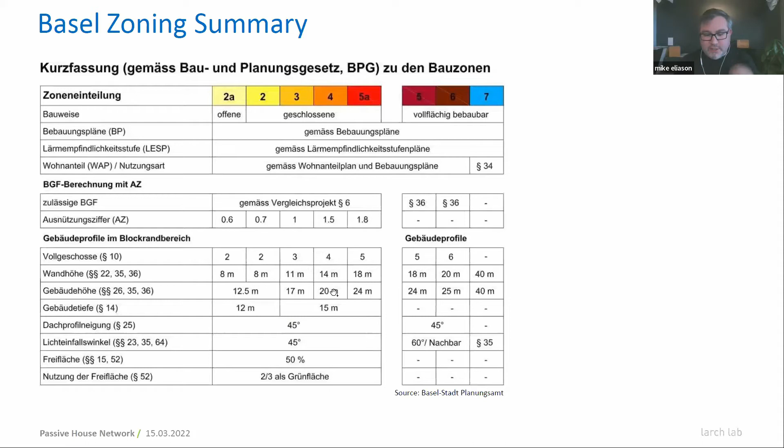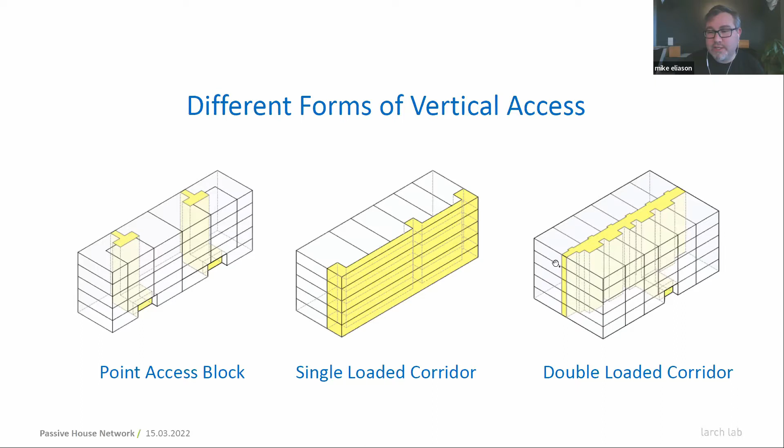There's the single loaded corridor, which is where you have a hallway or an exterior passageway that units are accessed from. So you'll have elevator, stair core, and then the corridor going between. And then there's the double loaded corridor. Double loaded corridor is probably the most commonly used access arrangement that you would see in the US these days. It's hallway corridor down the middle, and then units parceling off from either side of it.

So we'll start with the double loaded corridor. It's fairly efficient. This plan is 87% efficient. So 13% is circulation, elevator, corridor, stairway, things of that nature. What this leads to is small units though, because you can't really get large units here, since with the way we work in the US, you have to economically compete with studios and one bedrooms, which go for a lot higher.

There's also not the opportunity for cross ventilation. There's not the opportunity to get daylight on multiple sides. The closest you can get are corner units, and maybe you can have a corner aspect where you can get a couple of bedrooms on that.

I will note that I'm not a huge fan of double loaded corridors. You don't get a lot of respite from urban noise. So if this side of the building was an arterial, these people can't really open their windows because they have pollution, they have noise. And conversely, on the other side, maybe you're on the south side of the building, and in the US, external shades aren't really a priority. And so your building will be baking, or even on the west here in Seattle, the western exposure can be pretty harsh in the summer.

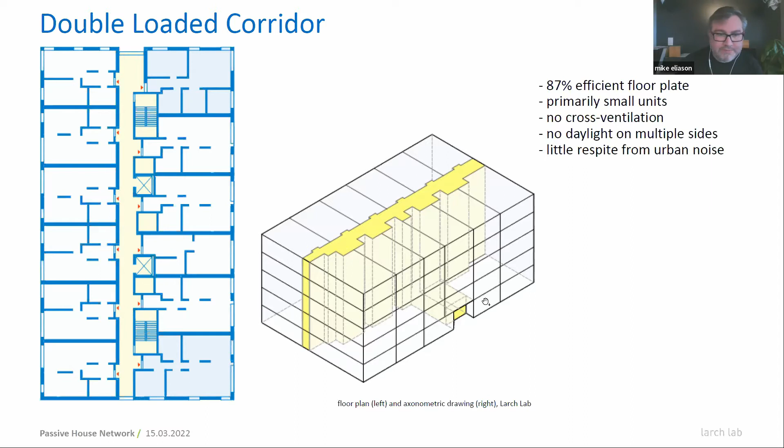Just a really quick example, Ankrom Moisan in Portland. Double loaded corridor, here's our corridor, stair, elevator core, stairway. You'll notice that most of these are 1 bedroom or studios. The exceptions are here on the corner: there's a 3-bedroom, there's a 2-bedroom, there's a 2-bedroom. So there's not a lot of variation in the unit sizes or types. I'll talk a little about that in a minute.

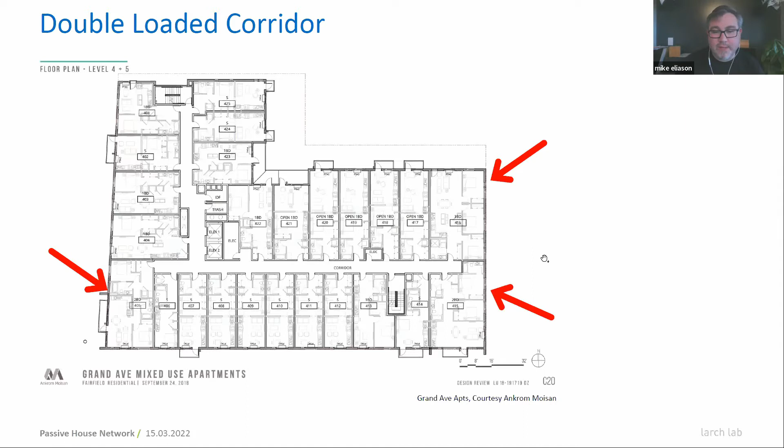Now we'll go to the single loaded corridor. So again, buildings on one side of the corridor, stairway, elevator, stairway. This is not as efficient. This plan is only 84% efficient. I've seen less.

You can get a diversity of unit sizes: studio, 1 bedroom, studio, 2-bedroom, 3-bedroom are possible. You can get cross ventilation, so you can open up windows and doors on either side and go through. You can get daylight on multiple sides. And so this is a significantly thinner building than the double loaded corridor.

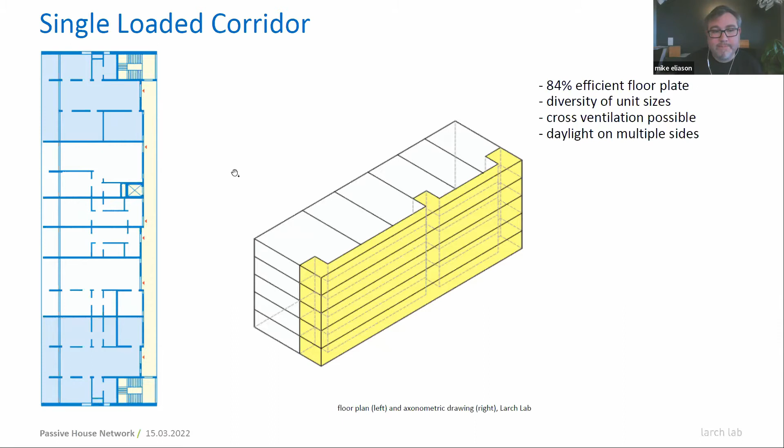This is a social housing project that we toured in Vienna a couple of years ago by Martin Treberspurg. There's a huge rail track here. So what they're doing is using the corridor of the single loaded corridor here to basically act as a noise buffer. So here's our corridor situation, stairs, elevator bank, stairs, right?

And all of the units are parceled off of that. What's interesting is this is a much larger development, and all of these buildings here on the south side are all connected point access blocks. We'll talk about that in a second.

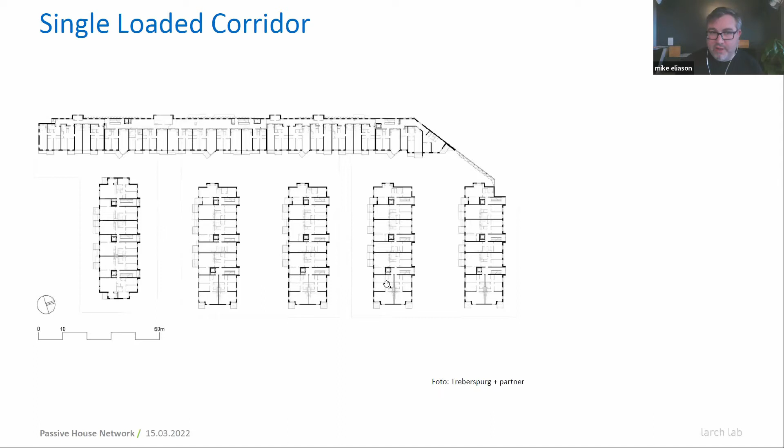The point access block is basically a building with a couple of units spread out around the core of the building, the stairway and the elevator. In Germany, it's called the Punkthaus or the Spanner. And there are limits to the number of units.

It does require more elevators at times, but what you get is a floor plan that is compact, a building that is compact, and a floor plate that is much more efficient. This one is almost 94% efficient. If you're 8% more efficient than the double loaded corridor, plus you're an 8-story building, that starts to add up over time.

You can get a diversity of unit sizes. There's the opportunity for cross ventilation. You can put the bedrooms on the quiet side of the building. So if you do live on an arterial, you're not sleeping with your windows open on the loud side, and you can have a better rest.

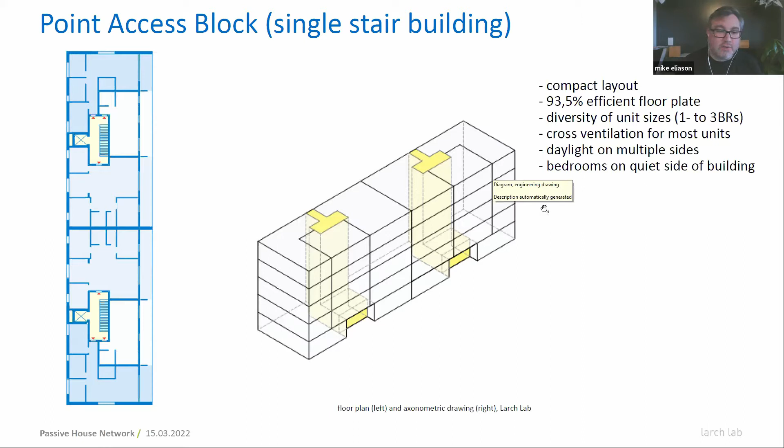I'll note that noise monitoring is a huge issue in the EU right now as they try to make cities quieter. It's not really anything that exists in the US, I think outside of some HUD projects.

This is a recurring conversation I've been having: we're architects, we're designing buildings, and buildings need two means of egress. This is true, but in Germany and the rest of the world where they have single stair buildings, the second means of egress is actually the fire department - they'll come and pull you out, and that's considered the second means of egress.

This is a project by Workshop A+D here in Seattle. In Seattle, we can do a 5-story point access block over parking, or live, work, or commercial. They actually got a code mod to do another floor, so it's a 7-story building. The International Building Code, which much of the US uses, allows for a 3-story single stair building plus basement.

There's a max on the number of units per floor, which is 4. There's a max common path of egress travel - you come from the corner and go to the stair, and that has to be under 125 feet. In Seattle we can go higher, but there are more restrictions. Your building has to be 1-hour construction, and we have to have a corridor.

I put this on here so you can see the difference. There's a corridor here that separates the stairway from the units. It's the same common path of egress travel, and again, max 4 units per core.

What's interesting is we can do 2 of these - you could gang this together, one on one side and one on the other, and have 8 units. I believe the code language in New York is pretty similar to the IBC. In New York, you guys can use scissor stairs as 2 means of egress. In the IBC and in Seattle, it will only count as 1, so we can put a scissor stair, but we still need to get a 2nd stair in to do it.

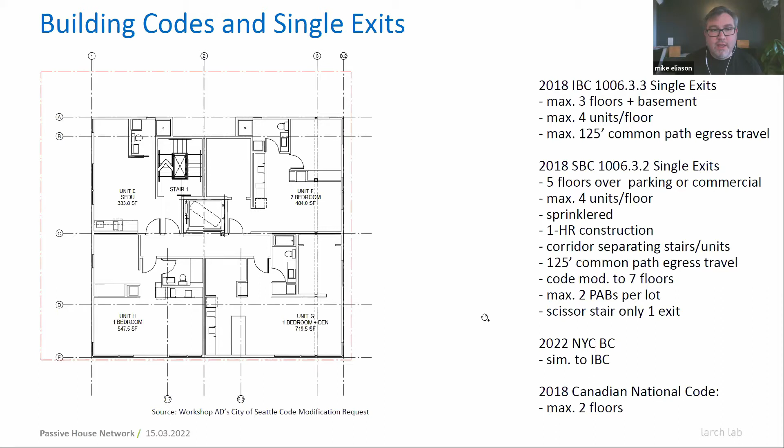The rest of the world is significantly different. Single stair buildings you find the world over - they're extremely common. Single loaded corridors are also very common, while the double loaded corridor is very rare. There are generally restrictions on the number of units per floor - Germany is 4, Austria is I think 8. There are travel distance requirements just like we had; in Germany it's 35 meters, which is 115 feet.

The issue of doorways in the stairway varies. In France, you have to have a corridor and a separated compartment for the stairway. In Germany, Switzerland, Austria, you can put the doors directly into the stairway, and that makes for some really interesting things. We'll talk about that later.

Seattle has to be sprinklered. Most of the world doesn't sprinkler buildings, at least low rise and mid rise. It is a higher rated construction than we need to do here. There are also requirements typically on the max floor area.

And you could do this several times on the same lot - it's not one instance. You could do, as I've been showing, pictures of 16 and 20 point access blocks that are all connected, allowing a wide diversity of unit types and sizes and things like that.

I was hired by the City of Vancouver to write a report on point access blocks as part of their thinking on redensification, re-compaction, and small lot development. I view this as a means of unlocking a lot of small lot development.

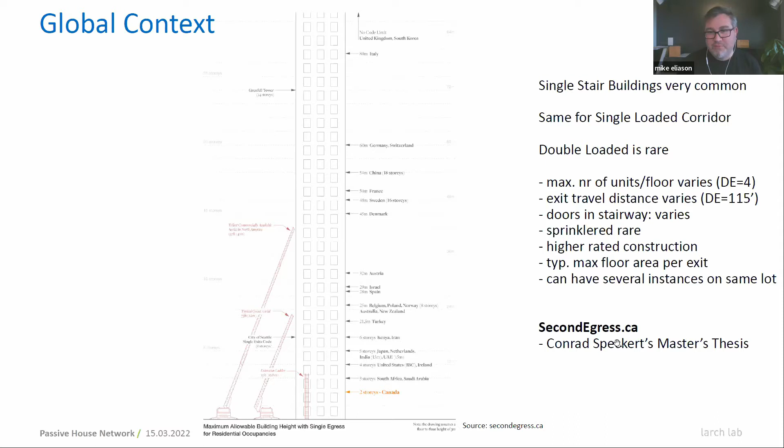It's super fascinating to see what you can do. The things I love about the point access block: one is the super compactness. You get light on multiple sides, even 3 sides. Cross ventilation is an important one, especially going forward with climate change as we get warmer.

I was in a panel last year with a local developer who said we don't need air conditioning or cross ventilation in buildings, since it gets down to the 50s at night in Seattle and we're fine. Normally that's true—historically that's been true.

Last year we had the heat dome, and for 3 days the temperature in our unit did not drop much below 80 degrees Fahrenheit—very unbearable. We have cross ventilation, so if we couldn't cross ventilate it likely would have been hotter. External shades aren't common in the US, so we're not really doing things to mitigate the heat gain we're going to see with climate change.

I think that's something we should be addressing. We should be testing our Passivhaus, our PHPP models, future-proofing them, gauging them against the warmer climate to make sure we're not overheating.

The other thing is you get a larger diversity of unit types over a double-loaded corridor. Here's a 3-bedroom, this is a 2-bedroom, again another 3-bedroom. It's rare to find these family-sized units in most double-loaded corridors because economically it doesn't make sense.

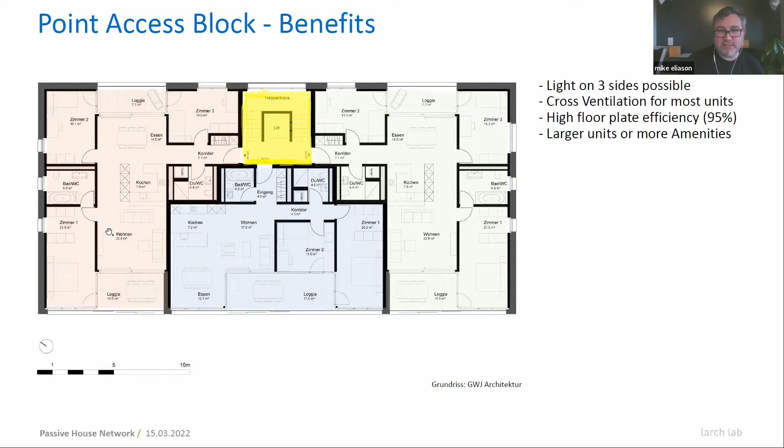Talking about connected point access blocks, this is a development in Switzerland—huge, something like 150 to 200 apartments. Each one of these little things are the stair cores. Let me highlight it a bit better.

So this is one point access block, this is another, and this is another. You get all of these buildings ganged together, giving you a diversity of units, and you don't have a ton of people sharing the same corridor or elevator.

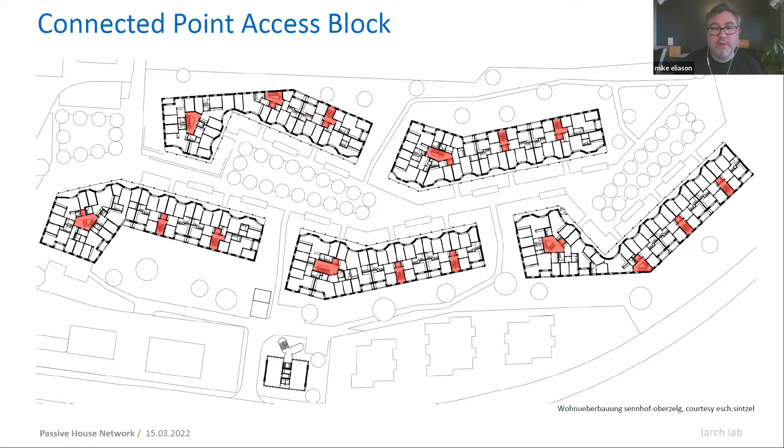This is one of the things we were thinking about during COVID—is it better to parcelize, compartmentalize your building so it's safer from a transmission spread standpoint? I don't know, I'm not a mechanical engineer or biologist who could speak to that. But why does this matter?

If we think about historically how we used to build—skinny parcels, largely for tax reasons, but other reasons too—these really wonderful mixed-use, compact neighborhoods had flexible floor plans, shops, family living above, later rentals, then condos. There was a lot of flexibility inherent in how we used to build, that human scale, fine-grained urbanism. We traveled to Europe and Tokyo and other places to find that wonderful compactness that doesn't exist outside a few places in the US or even North America.

For us it's really about car optional living as well. We don't ever want to own a car again—I hate driving. It's one of the things I miss about living in Germany, the ease of mobility. So for us it's about recreating bike-friendly urbanism.

Going back to passive house as our baseline, how do we stretch that so it's not just our buildings that are low energy, but our lifestyles? Lloyd Alter wrote a really good book on living the 1.5C lifestyle—highly recommend it if you haven't read it. And the other thing is most of these buildings are single stair buildings.

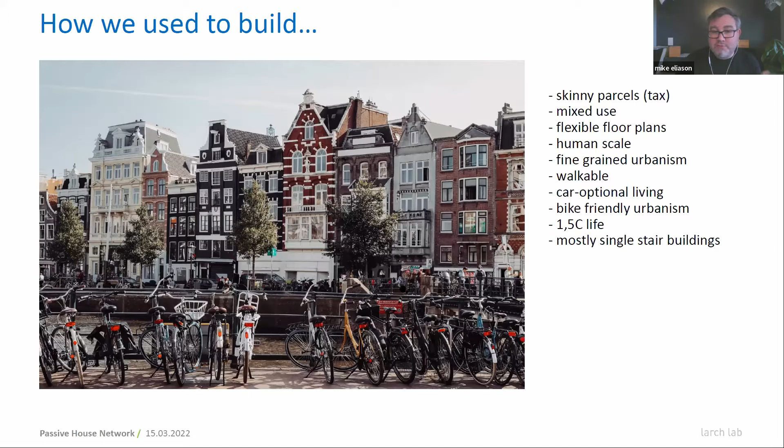This is an example in Barcelona, a late 1800s neighborhood. It's absolutely fabulous. These are all relatively small parcels, super dense, super deep. But again, most of them are point-access blocks, and it's just this really wonderful kind of gritty urbanism that you don't really find in the US much.

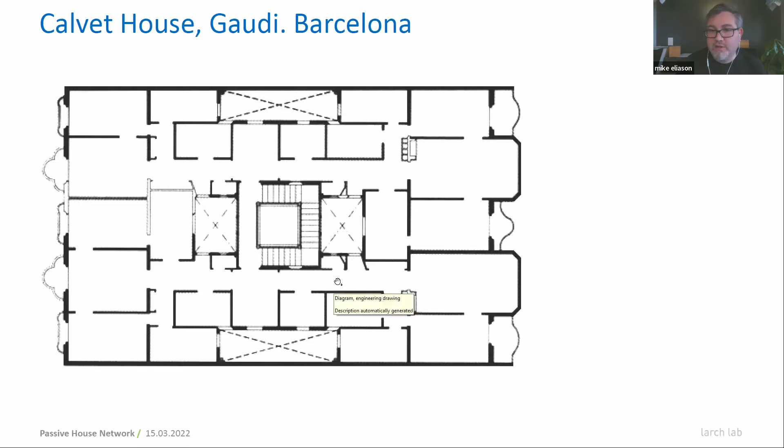This is one of the buildings in the example, Gaudi's Calvet House, a single stair building with a couple of courtyards. You can see this being like an apartment here. So if you're a relatively wealthy family wanting to live in the city in 1896 or whenever this was built, you would have that option. You wouldn't have to live in some suburban house.

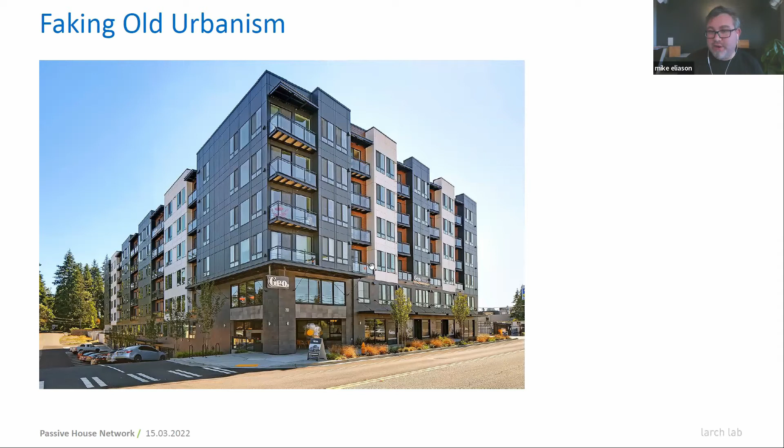The way that we build in the US is kind of this, I call it faking old urbanism. We do all of these tricks to make buildings look like they're not massive. So we'll use modulation to break up the facade, but it doesn't look good. Nobody likes it. There are other weird requirements.

Seattle passed an affordable housing bonus a couple of years ago. You got a height increase, but then we got really weird setback requirements. So there are passive house and embodied carbon implications in all of this. Your structure gets weird, gets more expensive. You have more surface area, which means more maintenance implications. It increases the energy, or decreases the energy efficiency versus a box. The embodied carbon goes up.

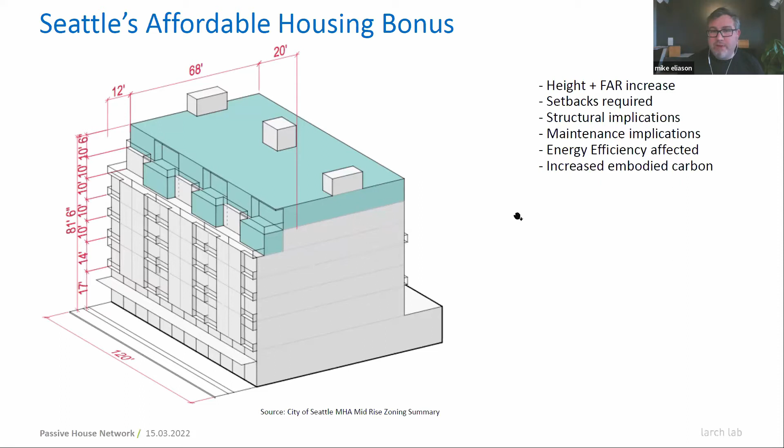So we pull all of these weird things to make buildings look smaller, but in the end they're not high performing. And sometimes they're just ridiculous.

Toronto has its mid-rise guidelines. The last couple of years, I've seen some really amazing proposals to really push as much as possible within these guidelines. Again, modulation, weird setbacks, deference to low-rise zones. This isn't really something that exists in most European cities. You could have a 6-story building next to a 2-story house and it's fine.

But what you see though is that these buildings take up so much of the lot, and the way that they're oriented, there's really no buffer between the low-rise zone next door and the high-density building. So we're creating these weird transitions with these expensive, funky buildings that don't perform well. And I think in a lot of ways they're not super livable. The units are really thin, really small, and super deep.

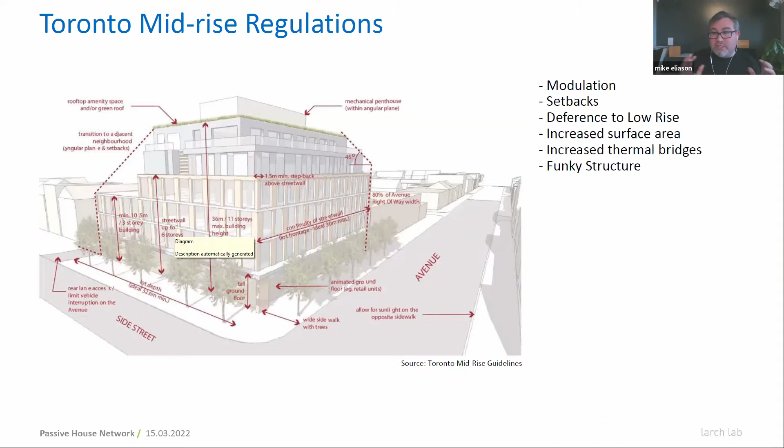As we think about passive house, there are a lot of implications to the surface area. Just the act of adding loggia or balconies can make a huge difference. This building on the left has 27% more surface area, and every one of these corners is a thermal bridge. It's another maintenance issue, but there are spatial qualities as well that have to be taken into account.

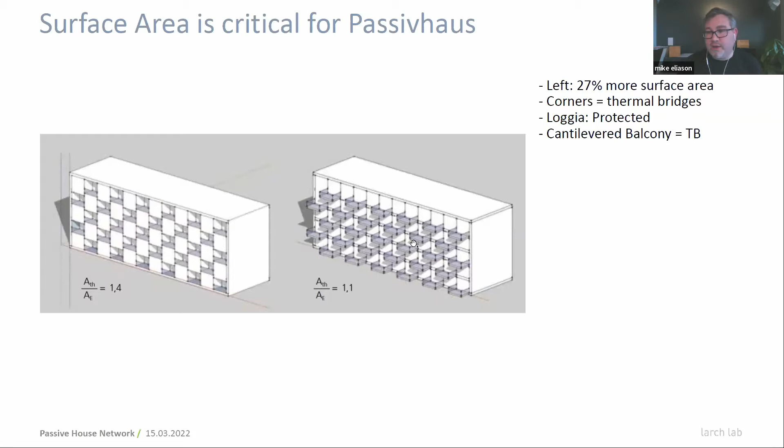The loggia is kind of protected, like an inset balcony. The cantilevered balcony is great, it's ubiquitous, but it's also a thermal bridge issue. So do you have the Schöck Isokorb or something else that you have to put in? In Europe that's standard. Here it's still difficult to get developers to even get their head around it.

So comparing two buildings, these are kind of comparable size. This is Mies van der Rohe. This is the Dennewitz Eins Baugruppe in Berlin, by 3 different architects. Again, you'll notice that these are mostly cellular, single unit, maybe 2-bedroom units.

Up here, there's a diversity of units. There's 2 bedrooms, 1 bedroom, 3 bedrooms, 4 bedrooms. You have units that have cross ventilation. You'll notice all the bedrooms are kind of on the quiet side of the building. There's a lot more variation, and I think there's a lot more livability that's inherent in a building like this.

This stairway here, you've got 2 neighbors. If it's 6 floors, this is your building. There are really only 12 households that you directly interact with on a daily basis. There are like 20 units on this one floor alone. So in thinking about how families reside in a city, for me, we lived in a wonderful 4-plex in Bavaria, and having that kind of intimacy really made knowing our neighbors a lot easier.

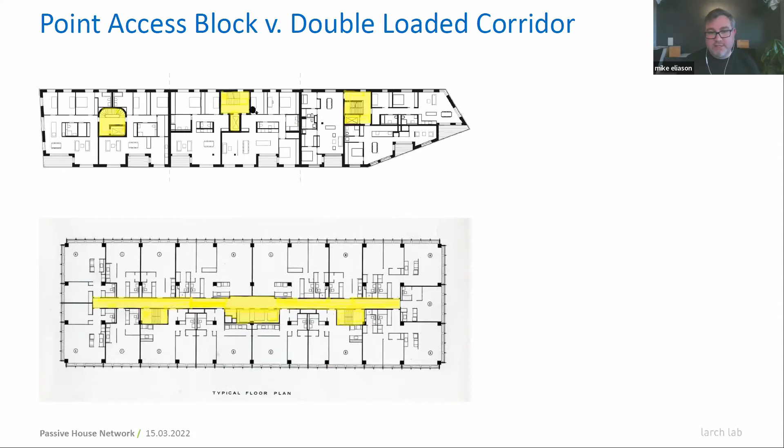And then this, I'm just highlighting the circulation. Again, this is 3 different buildings, mix of unit types. I think there's some maisonettes, light on multiple sides.

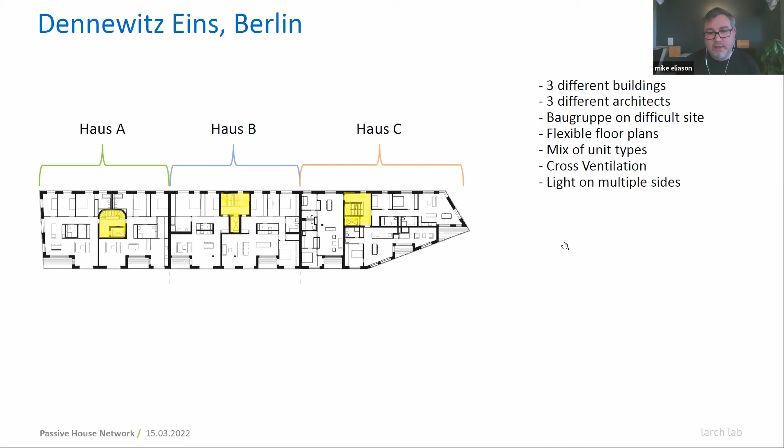For the report, there were a couple of case studies that we put together. This is a FRES architectes project in Paris, this really elegant 9-unit plus commercial infill building in kind of Haussmannian Paris. It's a mix of units from studios to 3 bedrooms, incredibly cost-effective infill compared to anything you would find in the US.

Really small parcel, it's 2,300 square feet and 9 units. There's no car parking, which again, in terms of thinking about carbon emissions and everything else, for me it's wonderful. There's a little bike room up the entry, and it meets the Effinergie standard, which isn't quite Passivhaus, but it's their low energy standard.

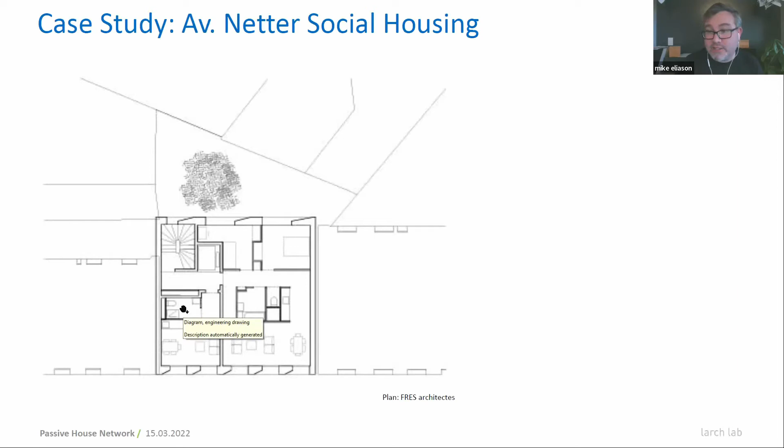And then here's the plan on the 2-bedroom side. Again, it's a really small parcel, postage stamp, 2-bedroom studio. Here's your circulation. If this was required to have 2 stairs, you're not getting a lot of units in this building, and most of your building is going to be circulation.

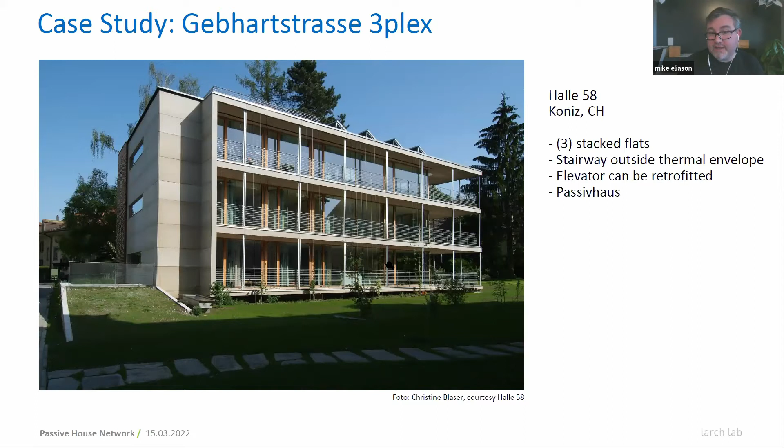This is a really wonderful Passivhaus triplex. I believe it won an award through PHI a couple of years ago, by Halle 58. It's 3 stacked flats, all 3 bedrooms. I love this - this is the south side, a functional deck that doubles as solar protection, and they have additional layers of active solar protection as well. I believe it wasn't built with an elevator, but it can be retrofitted.

You'll notice here that the stair is actually pulled outside of the thermal envelope. As Passivhaus folks, this could be open, it could be semi-conditioned, but we're not having to deal with the heat transmission and the expanded surface area of that space. I think that's actually really critical in thinking about low and mid-rise Passivhaus going forward. There are implications for elevator pressurization and all kinds of things.

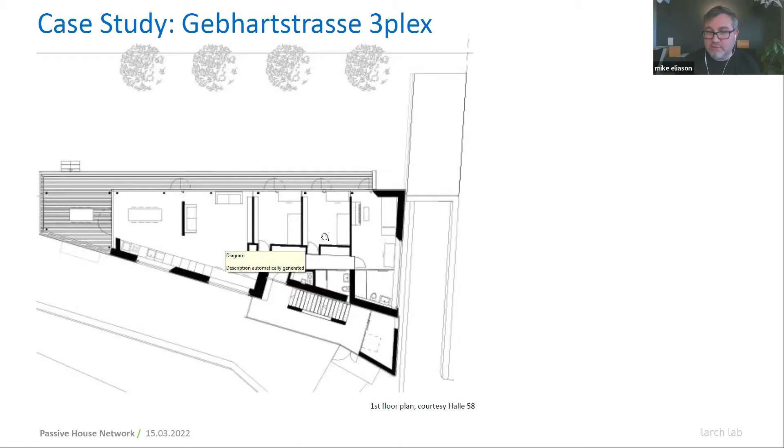So again, it's basically the same floor plan on every level: master bedroom, kids bedroom, kitchen, dining, living. It's not massive, but for us as a family of 4 with 2 kids, this would be ideal. But it's almost impossible to find anything like this in Seattle.

Through the report, we were connected with Public Architecture and Communication in Vancouver, who are working on Vienna House. Vienna House is being built in Vancouver. So there are firms that are collaborating on these projects - really wonderful projects, social housing.

They're aiming for Passivhaus, wood construction, prefabrication, 6 stories, 101 units plus amenities. It's a single loaded corridor wrapped around a courtyard. Considering the constraints in Canada, this is a super elegant building, and I kind of wish this was the standard everywhere.

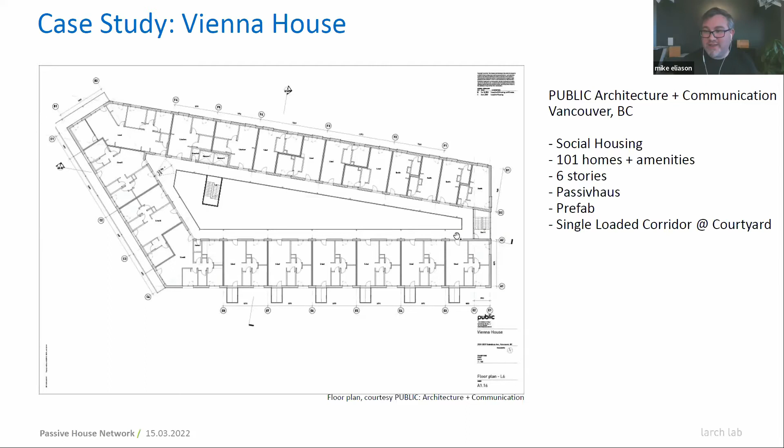There are 3 additional elevators that would need to be added - the public's design has 2. But what's interesting is the FAR decreased by 22%, so the amount of charged built area decreased by almost a quarter. The exterior envelope was also decreased by a quarter. So there are significant cost implications, or potential savings, for both of those moves.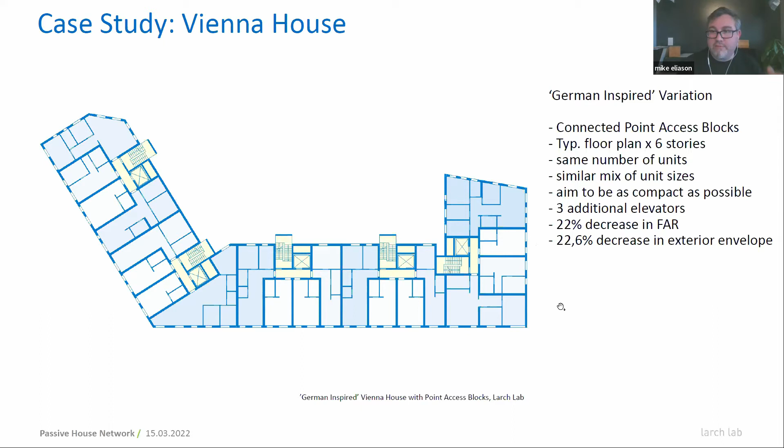The other thing too is with the single loaded corridor, the elevators are in one section, and so if you're mobility challenged, you have a much longer path. I don't know the exact layout, but if for some reason you lived on the opposite corner of the building from the elevators, there's a much larger path to those units than you would find in a point access block. So it's about thinking about livability, accessibility, flexibility.

Here I've got an overlay of the 2 thermal envelopes. The yellow is the thermal envelope for Public's original design for Vienna House, and the black outline is ours. There's a 15% decrease in the heated floor area, so again, there's less space that we're heating. It reduced the compactness by 8%, and this open space, this courtyard, becomes a little bit larger.

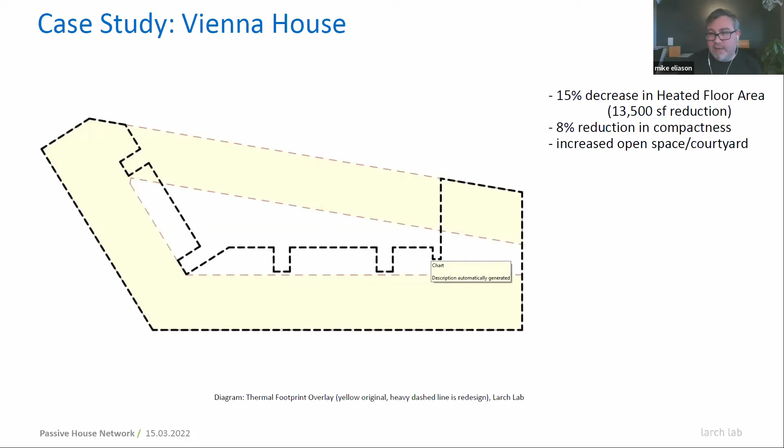So there are these trade-offs that I think a lot of European, or even Japanese and Mexican projects can have, that we don't really have the option for here. And going back to Passivhaus and compactness, we're really talking about these buildings that are kind of in this range, the 0.5 to 0.2 compactness ratios.

For me, it's these two: perimeter block development, and the infill—5, 6, 7, 8 story point access block, super efficient in every way. From an energy standpoint, cost savings are possible if you can get the single stair building. Building construction costs, you can't really compare Europe and the US because Europe is just wildly better.

And then there are zoning code implications, right? We're not getting the possibility to do a lot of buildings like this.

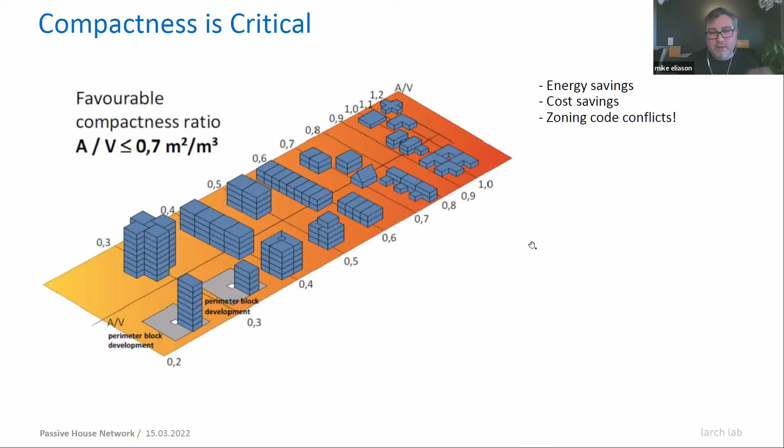And also from the Passivhaus standpoint, the treated floor area of a corridor is discounted at 60% chargeable. So if you have a double loaded corridor building and you're comparing it to a point access block, the double loaded corridor building's corridor ends up being an additional 600 square feet—but you can only count 360 of it towards your TFA. So your energy reference area becomes affected by the type of vertical access you're using, which years ago I would never have thought of, but now it's like, oh yeah, that makes a lot of sense.

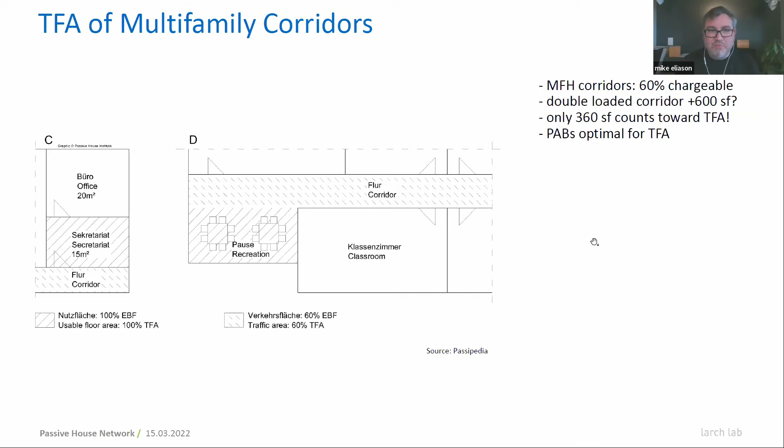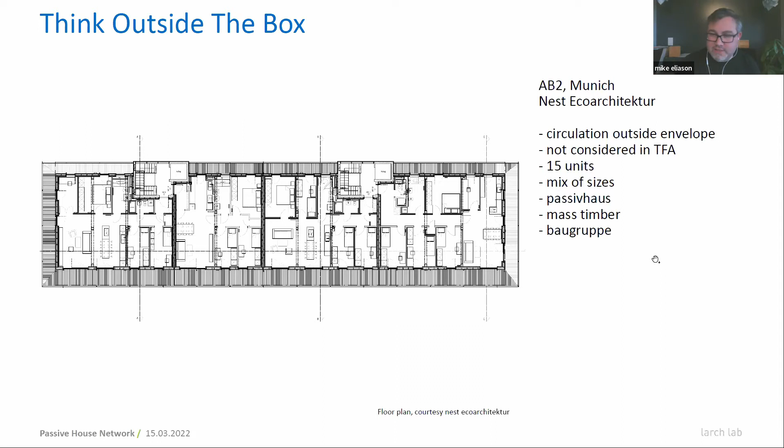And also thinking outside of the box again: putting the vertical circulation, the staircases, outside of the thermal core. This is the AB2, a Passivhaus mass timber Baugruppe in Munich by Nest Ecoarchitektur. It's a super elegant building—cross ventilation, mix of unit sizes, 2-bedroom, 4-bedroom, thinking about more flexible uses.

And in terms of embodied carbon, Aufstockungen, vertical additions—this is a 4-story single stair building in Vienna, and Josef Weichenberger came in and added 3 more stories. The way this works is the single stair building is effectively legal to 8, 10 stories—you're just extending the staircase and its rating to access the new floors, not carving out space for an additional stairway. So when we're thinking about general urban renewal and recompacting the city, there are some really elegant opportunities this opens up.

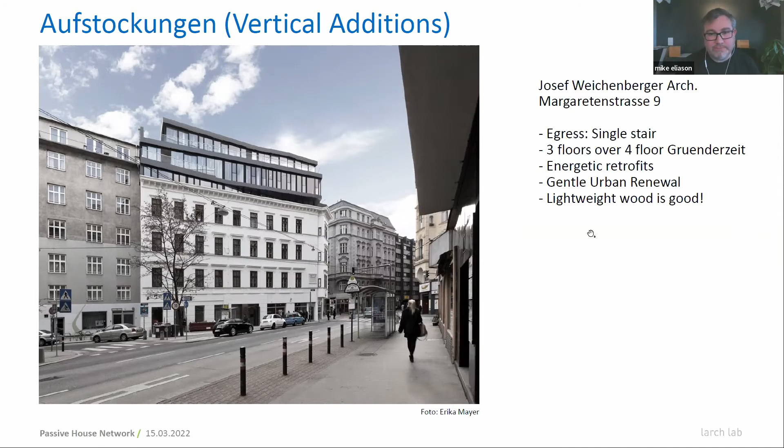And again, mitigating noise—going back to some more of the livability components. This is Alleswirdgut, a project almost finished in Munich on Ludlstrasse: 373 homes, a daycare, a youth center, a traffic calmed interior, and they're using the buildings to basically act as a barrier to the highway it's effectively located off of.

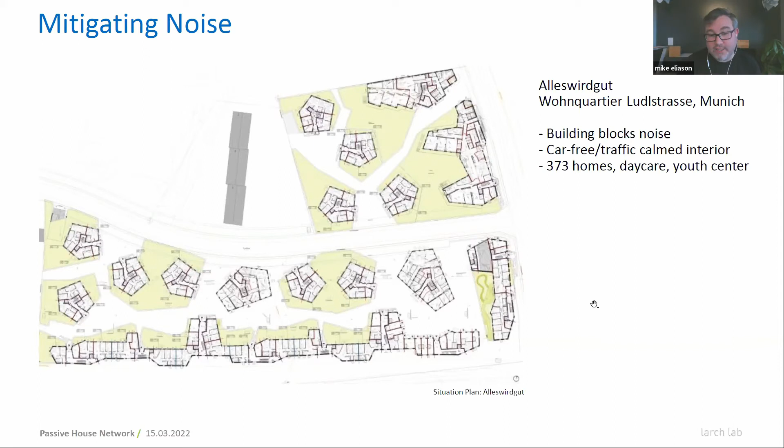As we're thinking about the climate crisis—we have wildfire smoke season now, we had a heat dome, there's rampant flooding everywhere it seems—it feels like the US industry is wholly unprepared for all of this. We don't have passive house mandates, we're not using buildings as cooling centers or fresh air centers to the degree we could, we don't have external shading on our buildings. Passive house for me is kind of like a catalyst for thinking beyond the status quo in terms of not just how we build, but how we live.

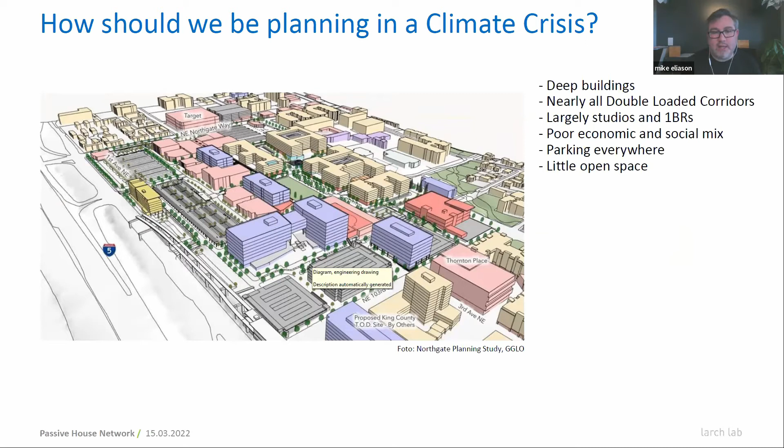So like Ken said, looking at the larger scale—we had a bunch of light rail stations that opened up recently. This is a planning study by a local firm here: the light rail station, a ton of parking, really thick buildings, not a lot of open space. All these buildings, if they're not offices, are going to be largely double loaded corridor buildings, so you're going to have a lot of studios and 1-bedrooms. You're not going to have a lot of economic and social mix like you see in other places, and not a lot of open space.

Again, Roosevelt, here's our light rail station in Seattle. These are mostly 3, 4, 5, 6-story buildings. It's like no open space was added. It's a little bit of social housing, no slow streets, no pedestrian zone. But like...

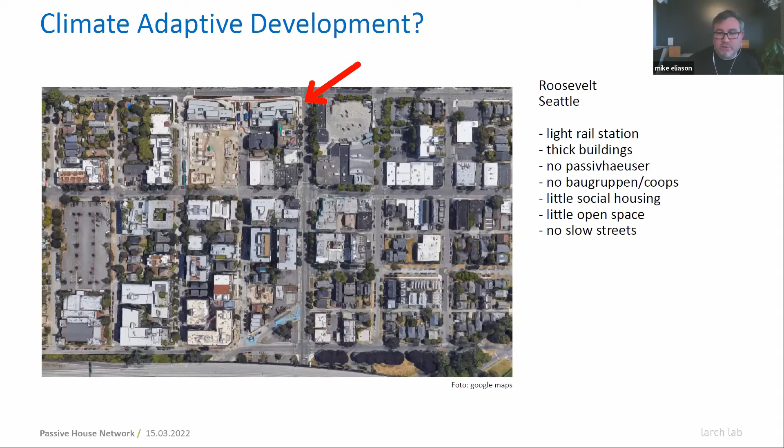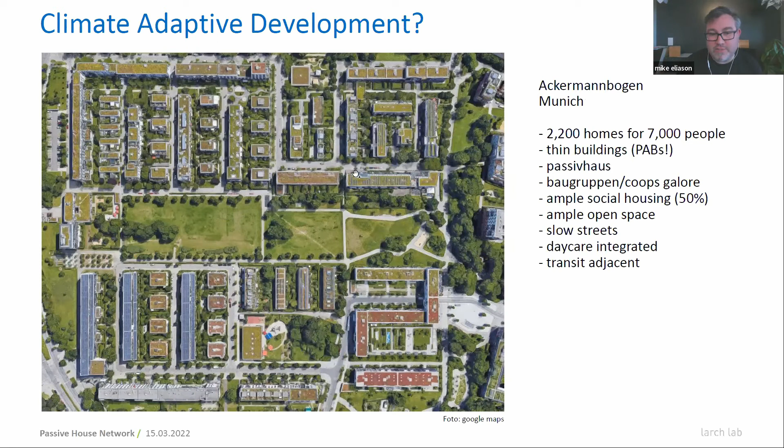What if we were to change the way we think about developing? We have these brownfield developments with thin buildings, so you can have cross ventilation, daylight on multiple sides, bedrooms on the quiet side, a mix of Baugruppen, co-ops and social housing instead of 95% market rate housing. You could have open space, and space for daycare integrated into the community, connected to transit.

This is the Sonnwendviertel in Vienna, a bunch of passive house buildings here. It's a huge project, 13,000 residents and 5,000 homes. There's space for 20,000 jobs. There's a huge educational campus over here. The buildings are effectively acting as a sound barrier to keep the park relatively quiet.

Here along the rail, it's a lot of car parking and parking garages. So they've pulled the parking out of the development to reinforce this quiet, livable interior. There's a pedestrian zone, shops, restaurants and cafes, and a tram runs through the middle of it. This is beautiful.

I can totally see myself living here with my kids forever. And there's affordable social housing spaces, affordable co-working spaces, artist studios. It's really like, how we design cities needs to change dramatically.

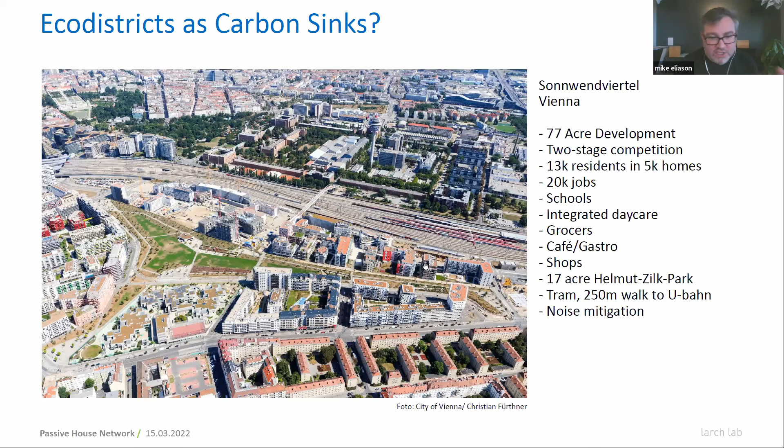We're doing good. Great job, Mike. Do you want to stop sharing? Yeah, let's see if I'll spotlight myself.

That's fabulous, so inspiring and equally frustrating, I think, a lot of times when you get exposed to this. So we definitely have some questions here. I think one of the things that I just took away there at the end, you're talking about thick buildings bad, thick walls good. Yes, so it depends on what we're talking about, the context there.